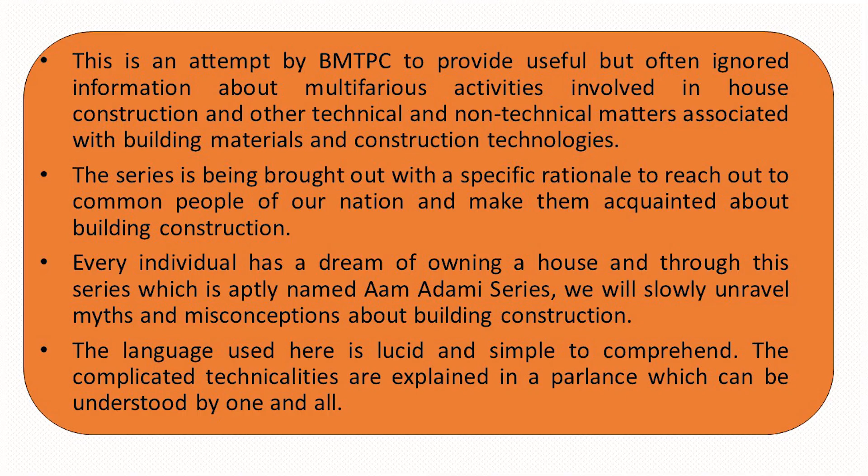Through this building digest series, BMTPC is making an attempt to create awareness about the various facets of housing construction by owners. As explained in the previous slide, construction of a house is a multidisciplinary task involving a large number of professionals and non-professionals in the field of construction besides the owner.

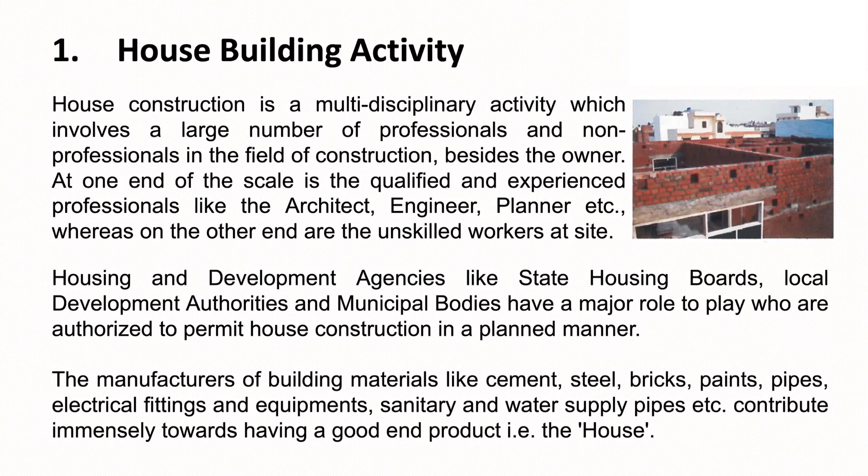Therefore, it is important to have qualified experienced professionals on one hand, and on the other hand supervise the work properly as it is being executed by a set of skilled as well as unskilled workers at site. Also, it is important to use good quality branded building materials such as cement, steel, bricks, paints, pipes, fittings, equipment, sanitary and water pipes, preferably of ISI mark, so as to give a good end product, that is your house.

The role of the contractor, which we hire for construction, has an equally important role to play because he has to mobilize his resources to ensure timely completion of desired quality of house. Also, skilled workforce like masons, carpenters, plumbers, electricians have a very important role to play with the help of semi-skilled and unskilled workers. This digest will briefly elaborate on the roles of major players involved in house construction.

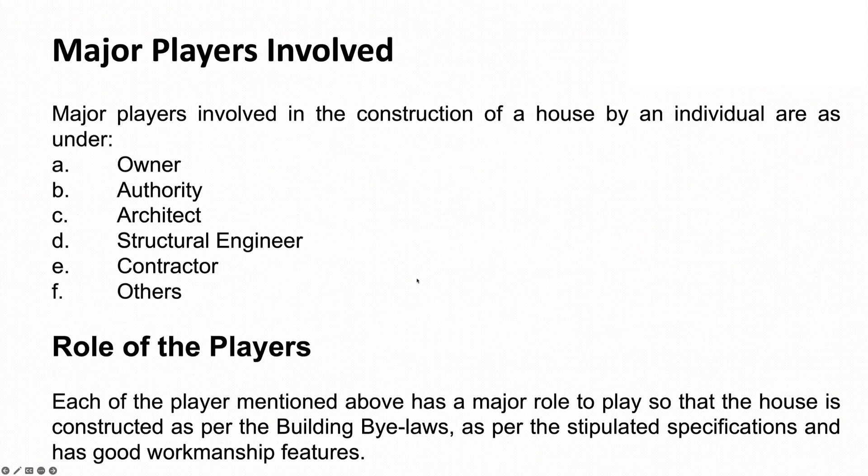Each has a major role to play with the overall objective of delivering a good quality, comfortable house with desired specifications and workmanship, fulfilling the local bylaws. Let me briefly explain each player's role to all of you.

First is the owner, that is we ourselves. The owner is the key person, and therefore the owner has to ensure that he has the legal right over the plot of land over which the house is to be constructed. Also, the owner has to coordinate with all professionals and people involved right from the planning and construction stage with a view to obtain building approvals, other permits, completion certificate, and its occupancy.

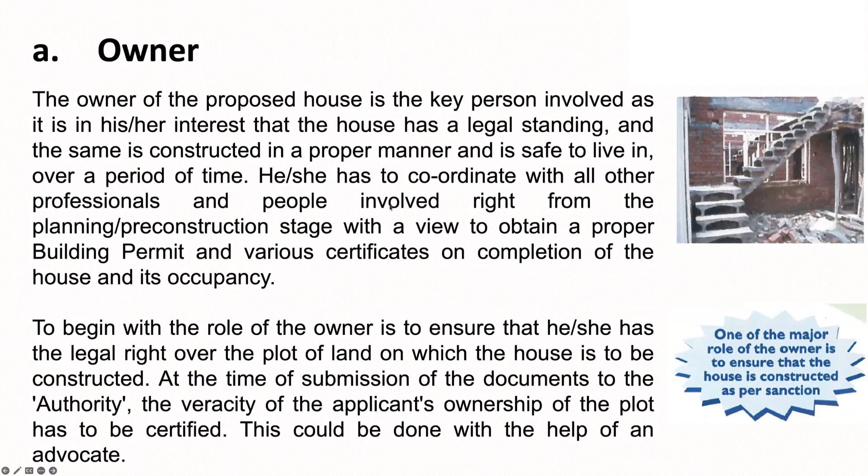The selection of architect also lies with the owner, and it is important to have an experienced and professional architect. The civil engineer or structural engineer is also required, and the responsibility lies with the owner for selection of a structural engineer. Also, the contractor, supervisor, and other personnel are required to be selected by the owner.

It is important to note that the owner should ensure safety at his or her site and shall not cause inconvenience to others in terms of noise, dust, etc.

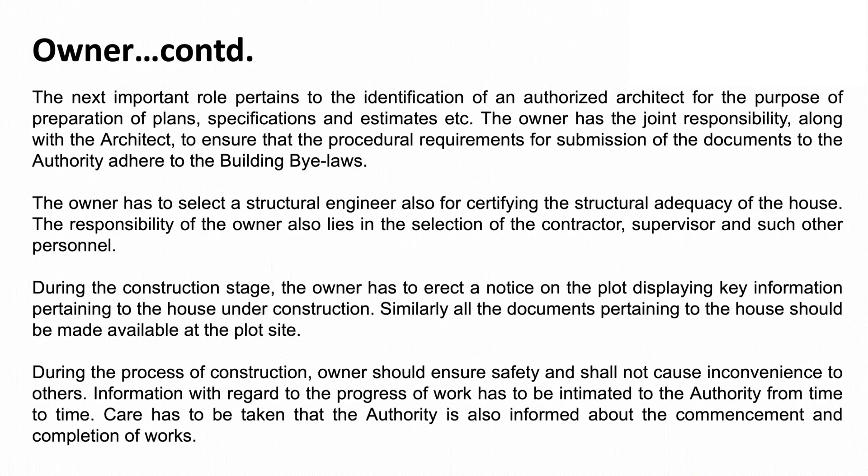The next player involved is the authority, which means housing board or development authority or municipality, as the case may be. The rules and regulations prescribed by the authority need to be followed religiously. It is often seen that owners try to bypass these rules.

However, let me remind you that these bodies are set up through central and state acts and are responsible for planned development of the area, and they have jurisdiction and power for sanctioning building permits as per building bylaws, and at the same time issue notice to stop the work if not done in line with the building bylaws. Therefore, the authority has an important role to play in construction of a house.

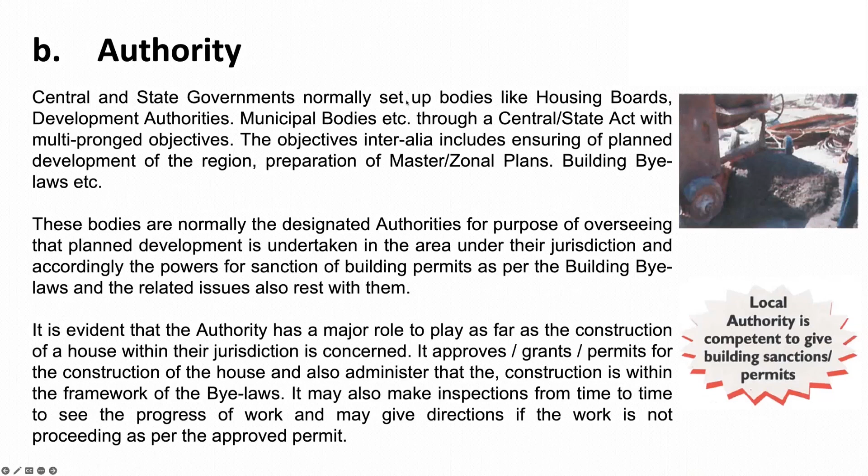Also, they may make inspections from time to time and give directions. To obtain a building permit, the housing plan and other documents along with fees need to be submitted to the authority. Normally, the application is scrutinized and the building permit is granted within a stipulated time frame. The details of documents to be submitted, forms, etc.

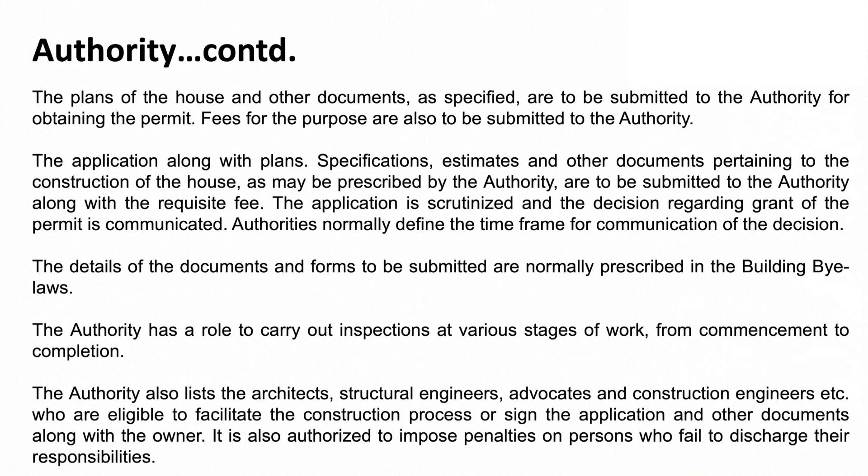These are easily available nowadays online. Another important aspect is that the authority has an impaneled list of architects, engineers, advocates, and construction engineers who are eligible to facilitate the construction process and sign the application and other documents along with owners. Remember, authorities are authorized to impose penalties if the work is not done properly.

The next person is the architect. An architect is a person who makes architectural plans and workable drawings for your house and helps guide you through the building construction, suggesting different fittings, products, etc. The architect has multiple roles to play, such as supervising the construction, preparing the plan as per the requirement of the owner, and facilitating submission of the application and its approval.

The architect should also be well versed with local specifications of construction, choice of building materials, etc. Normally, ensuring compliance with all procedural requirements specified by local authorities, along with information regarding progress, lies with the architect along with the owner.

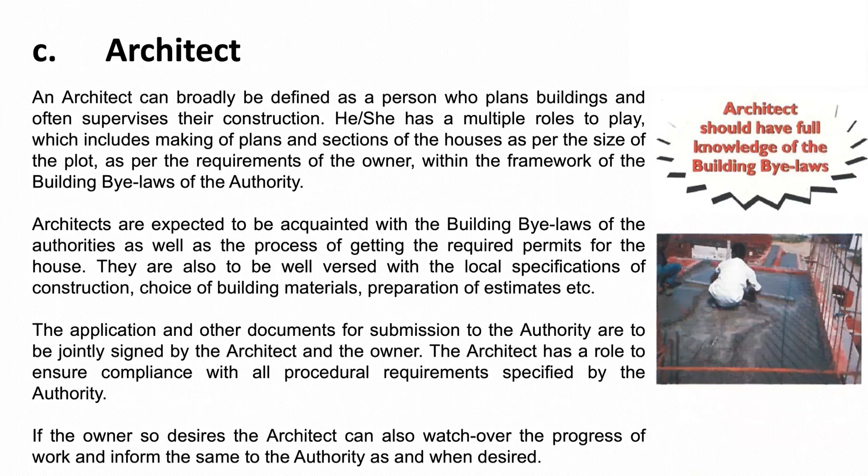It is seen that architects normally hire civil engineers who help them carry out structural design of the house. Let me clearly tell my viewers that structural design is different from architectural design. Architectural design is all about the actual forms and shape of the house, that is plan, elevations, sections, whereas structural design is about sizes of foundations, beams, columns, slabs, along with the number of steel bars required.

Normally, the structural design is done through structural analysis and is a must for making your house strong, stable, and safe from natural hazards. On account of recent, recurrent earthquakes and damages to houses, authorities nowadays require a structural engineer to authenticate the structural safety of the house being constructed.

Therefore, the structural engineer has a role to scrutinize, verify, and certify the structural design and specification of the proposed house, complying with building bylaws. The structural safety certificate also needs to be given by the structural engineer.

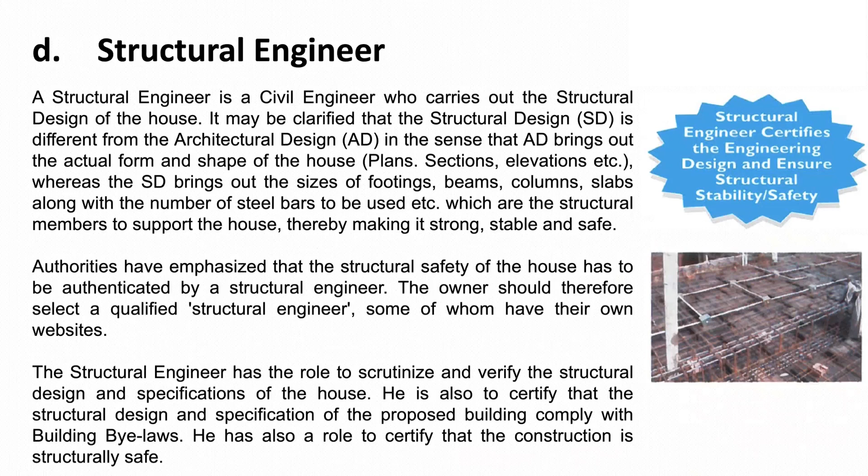The next most important person for house construction is the contractor, who has a wide range of roles, duties, and responsibilities. He is the one who manages the construction and ensures that all necessary measures are taken which result in a quality finished product. The contractor needs to plan and carry out all the activities related to construction of your house.

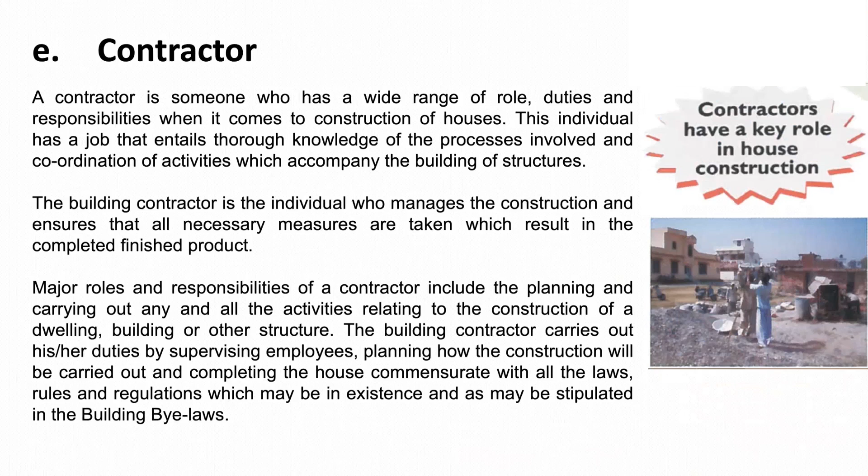He needs to supervise his employees and do the planning of how the construction will be carried out and completed in line with the laws, rules, and regulations. The most important role for the contractor is to plan and schedule the construction.

By doing so, requirements of construction material at different stages, requirement of labor, tools, plants, water, and power can be ascertained from time to time. Equipment like concrete mixers, welding machines, strainers, centering, and shuttering material are to be hired by the contractor.

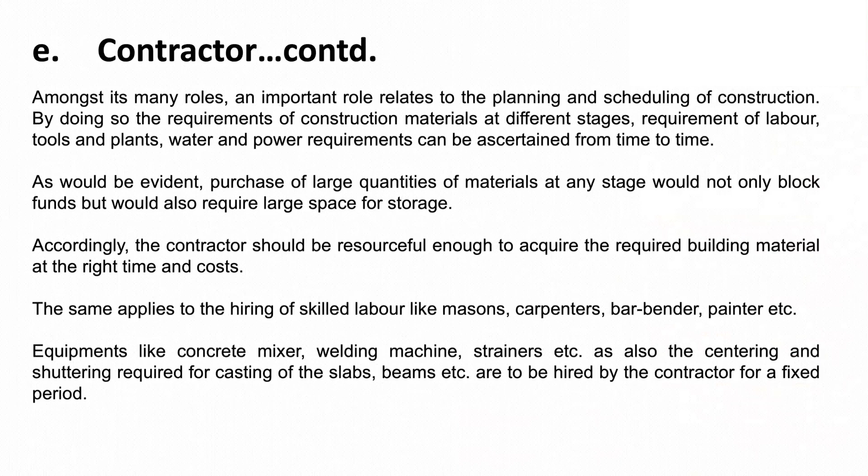Further, the materials required from time to time need to be procured by the contractor so as to avoid large spaces for storage and block funds. The record of skilled and unskilled workers being employed at site is also the responsibility of the contractor. Besides, he has to ensure safety of labor during the construction process and provide temporary accommodation to them at site.

The building contractor is the most important individual who can resolve issues in an expeditious manner, as delay in one will delay the entire house construction. Besides, the contractor should be experienced enough to deal with exigencies at the site.

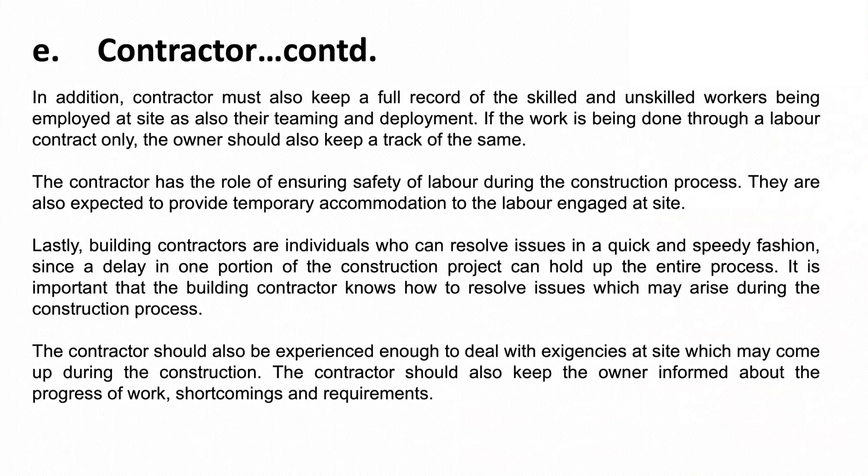There are many others who are relevant to the owner, such as electrician, plumber, sanitary expert, supervisor, security personnel, who help in timely completion of your house.

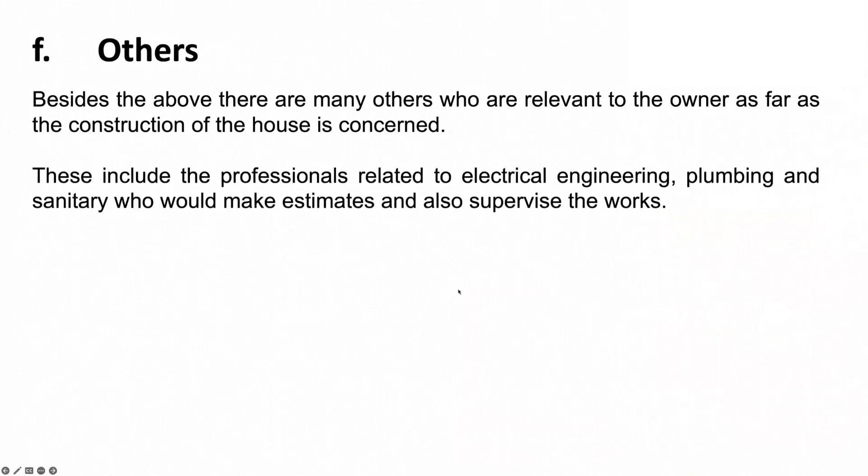At last, as explained through this digest, there are a large number of players involved in construction of a house, and each one of them has a specific role to play. However, the roles may overlap, but the owner has to coordinate effectively in order to get maximum returns of the money spent.

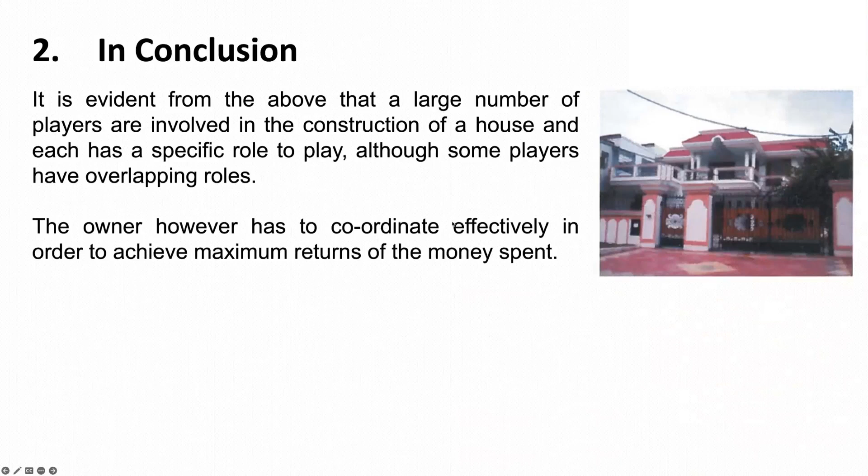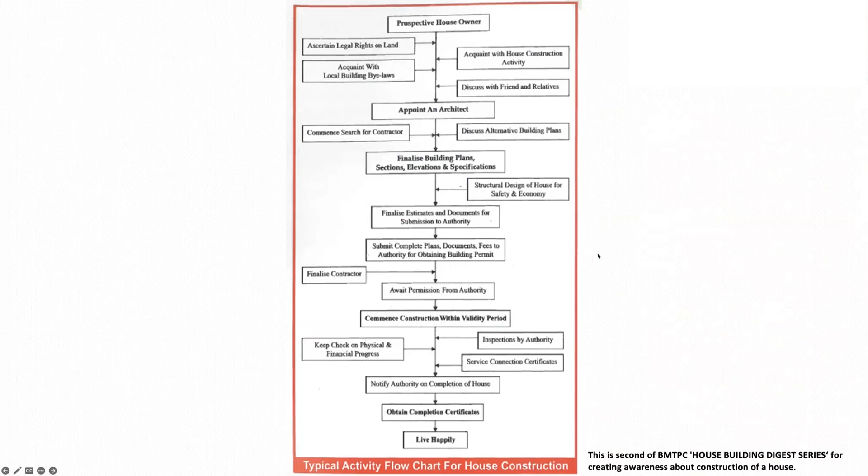Commence construction after obtaining the building permit, keep check on physical and financial progress, and obtain the completion certificate when the house is completed, and then occupy the house and live happily.

This building digest number 2 could throw light on different players involved in house construction and can be downloaded from www.bmtpc.org. The next topic to be covered will be procedures and terminologies.